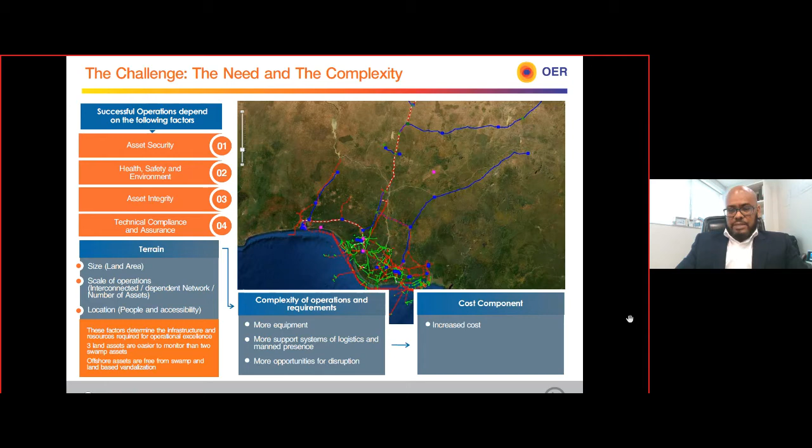But all these complexities that you have come with costs. Cost - that's a very, very sinister word.

So right now, what do we have in terms of our methods of surveillance? Our typical methods are manned aerial surveillance - taking helicopters across your pipelines, just taking a look at how things are going on a regular basis. You also have community surveillance, where community personnel take a look at our assets. Then you have patrols and inspections, typically done by the company itself, the operating company. And then you have electronic surveillance.

The problems with each of these, I'll stress in a minute. For manned aerial surveillance, what we're talking about is helicopters. You'd fly across your pipeline and assets, with a guy on the door with a pair of binoculars looking down. The problem is there's risk to onboard personnel every time you take a helicopter up, and if you're flying over unfriendly terrain, there have been incidents of people shooting at helicopters since they don't want to be watched.

You also have insufficient frequency, since you can only go over your assets so often, and inadequate data capturing. Apart from a few photographs you could take, there's really not much you can do as far as that's concerned.

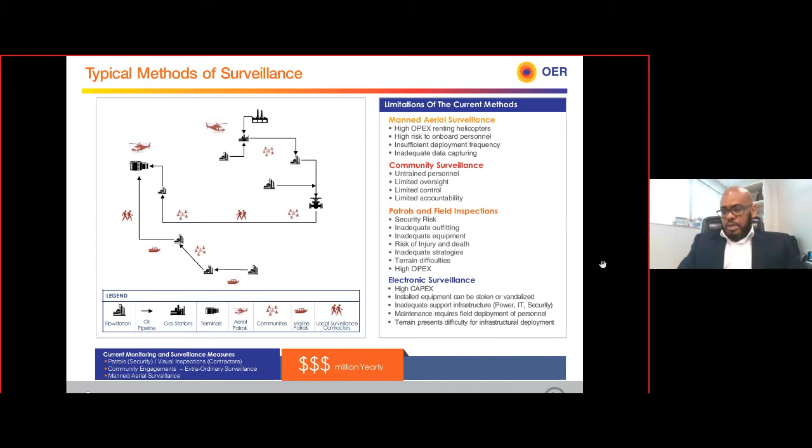So what is the goal? First and foremost, safe operations: to execute surveillance, monitoring, and inspection activities with the safety of personnel, equipment, and assets in mind. Also cost effectiveness, since we don't want to pay excessive amounts if we don't have to, minimum downtime, and an integrated approach where we take data from several sources and put it together to give us a big picture of what exactly is going on.

We want improved control of human error, correct use of algorithms, analytics, and evaluation of data, which will give us increased accuracy. Last but not least, we want a quick and efficient response, because it doesn't make sense if your information is several hours or several days old. You lose the initiative and it's essentially useless.

Options. We looked at several options across the entire spectrum of surveillance, starting with satellite imagery, which is the use of satellites to give us images of the Earth.

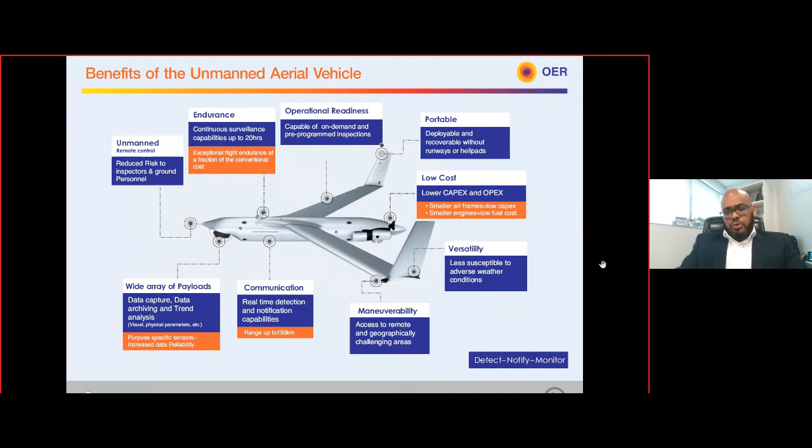And then, of course, communication, you're able to communicate real time with your base, and a wide array of payloads. Now this is very, very important. Your UAV is quite versatile to the point whereby if you can carry it, you can use it. So your camera, different types of cameras, different types of payloads, different types of equipment, essentially, to be able to achieve your objectives. I'll go into that in a little bit more detail.

But first and foremost, what kinds of UASs do we have? UAS, UAV, unmanned air systems, unmanned air vehicles. There are different types of acronyms. You can call them, in short, drones, if the acronyms are getting to you.

I'm just talking about these UASs, the classification based on endurance, altitude, and range, which are key to selecting what kind of UAS you want. You have the Raven, which is larger than your Parrot, with a bit more endurance, in the mini category. In that part, you have ranges of up to about 10 kilometers, and you can go as high as about 150 to 200 meters.

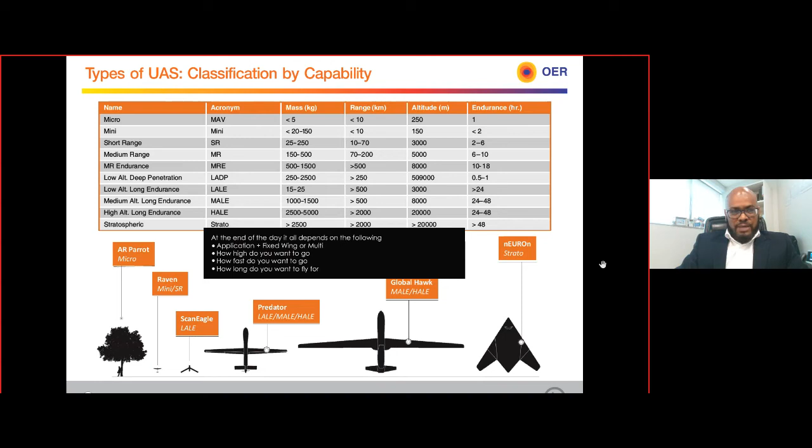And then your payloads and sensors. Now these are the things that your UAVs will be carrying. Optical cameras. Again, if you recall, I mentioned that in the case of a helicopter and our normal use right now, you have your guy sitting down at the door of the helicopter, looking downwards with his camera, taking a few pictures here and there and a binocular to look around. But you have optical cameras, which are more versatile with zoom capability and other very advanced sensors that you can utilize on your drones.

Thermal cameras, these are able to detect differences in temperature, which make them very versatile through night, and also are able to see through fog and smoke, and are able to detect intruders through tree cover. Again, in the Delta, you have a lot of foliage, so obviously you want to be able to see through that foliage.

You have hyperspectral cameras, and you have shortwave infrared cameras which are able to detect spills and through moisture detection. You have LiDAR, which is 3D sensing, shortwave infrared cameras, and communications antennas, which can boost communication signals and range over a larger area. So you can see these are very, very versatile options that can be carried by your UAV.

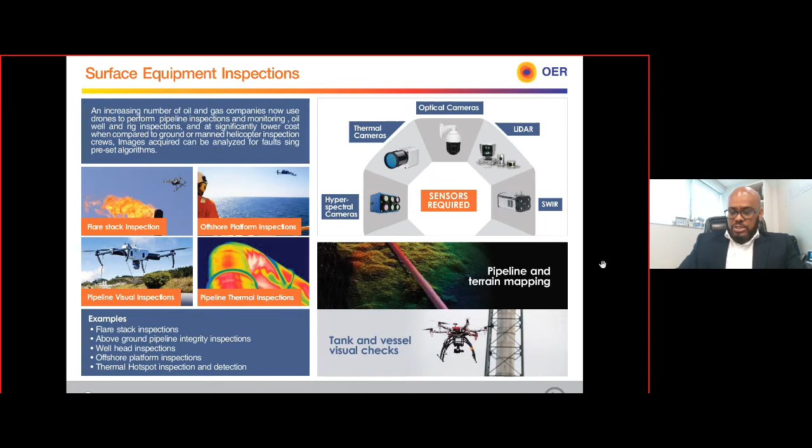You're also able to look at tanks and vessels, especially those with very serious height and depth.

Very important is environmental monitoring and impact assessment. Combining different images together, you'll be able to take a look at the environmental impact assessment and emissions monitoring. UAVs can be equipped with different types of gas emission sensors, and you're able to look at your vegetation over a period, the impacts of an oil spill, how it's moved from a historical perspective over a few days, or if there's any remediation in your environment as a result of that oil spill.

Other applications which are also gaining a lot of popularity are construction progress monitoring, where you're able to see on a holistic basis how your construction site looks compared to the progress you expect. Also pipeline route evaluation, looking at erosion levels and elevation, as well as 3D scans of facilities, which are very important nowadays and used for a variety of projects, becoming increasingly popular.

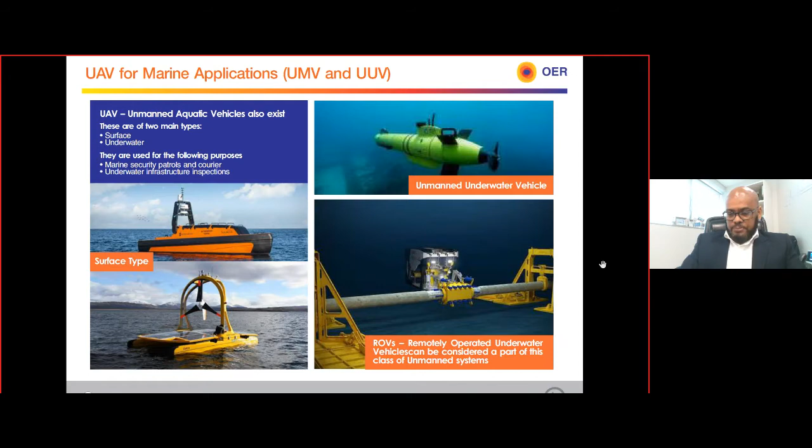We're also going to talk now about the additional value-added propositions, the software, the analytics, and the things that make your UAVs a lot more intelligent than just a normal eye inspecting things. So they have several benefits of analytics and Internet of Things integration.

First is internal map generation, where several individual snapshots are stitched together to create a seamless map. One advantage is that you can look at time changes, how a particular area has changed, if there are any disruptions, because your map over a particular period might change if there are disruptions.

You also have automated spill detection. Different levels of spectral images are able to detect different types of spills, and in many cases also estimate the volumes of the spills. Very useful for environmental monitoring.

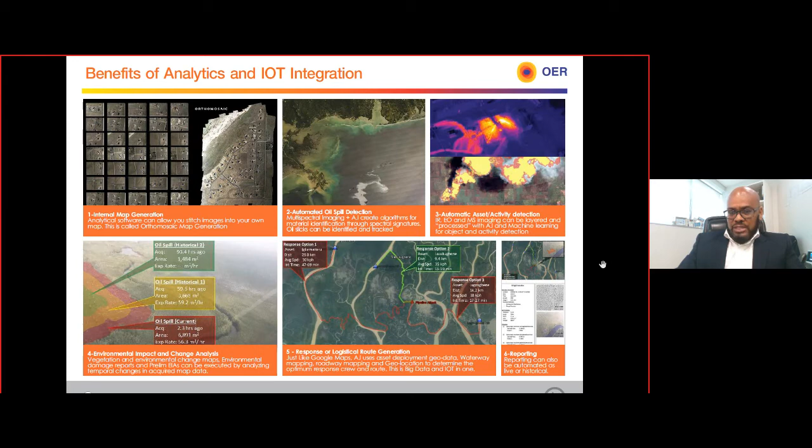So a typical security and surveillance CONOPS, as it's called, concept of operations. I'm just going to go through a typical ConOps. Your UAV, typically what happens, it goes along its route, it detects suspicious persons or activities within a pipeline route, right of way, sends real-time imagery to your control and command center.

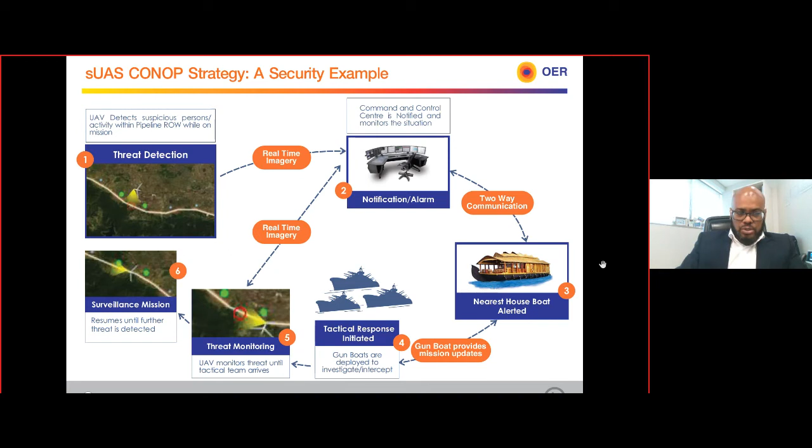All this time, your UAV is circling in the area, able to guide the teams to the exact location of the interference, and also able to update the information as it becomes available. Then, of course, surveillance will continue until the threat is detected and eliminated.

So, in conclusion, the future of asset monitoring and surveillance: coming from where we're coming from, we see a world or an operation where we can create a vast network of UAS infrastructure to replace conventional manned helicopter and individual efforts. This can be integrated into existing infrastructure, the Internet of Things, where each of the equipment and surveillance systems talk to each other.

It also provides vast data for improved analytics. Again, the more data you have, the more useful analytics you'll be able to do, which can help in making decisions. Ultimately, the reason for this is to reduce operational complexity and improve uptime.

So how do we make this possible? The requirements for commercial drone applications in Nigeria require several steps. You need to conduct research and development of operations within the Nigerian oil and gas space. Security clearances are required from different security and intelligence agencies in Nigeria and from technical partner countries, depending on the suppliers—things like ITAR permits and the like. Permits and certificates for end-user licenses from the aviation regulatory bodies. A proof of concept, test flights and demonstration of analytics, and then solid and robust technical partnerships for both hardware and analytics.

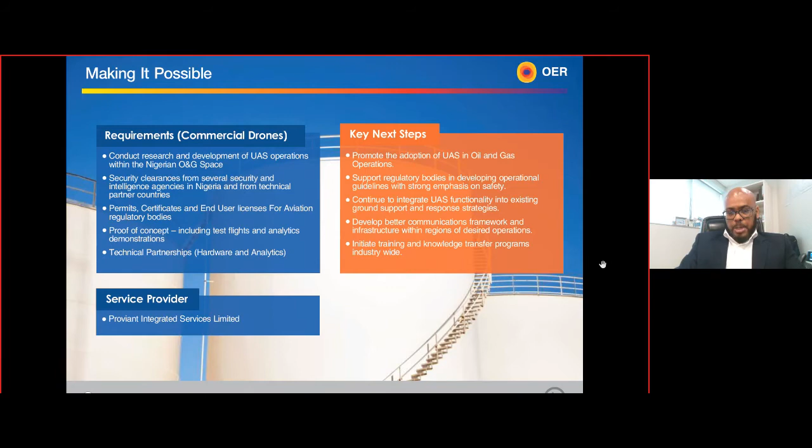Thank you very much. That is all I have, and I'll be able to take any questions, concerns, comments, and contributions. Thank you very much.

I can hear an echo from my end. Does everybody hear me all right?

Thank you very much, Engineer Anthony Sawyerr, for such an enlightening presentation. It really is an eye-opener to see the capabilities of these small unmanned aerial vehicles. As you have rightly presented, they have very little, tiny footprints in our oil and gas space, but they are capable of quite a number of things, not just as a camera to take pictures, but a whole gamut of sensors that enable data flow and data management.